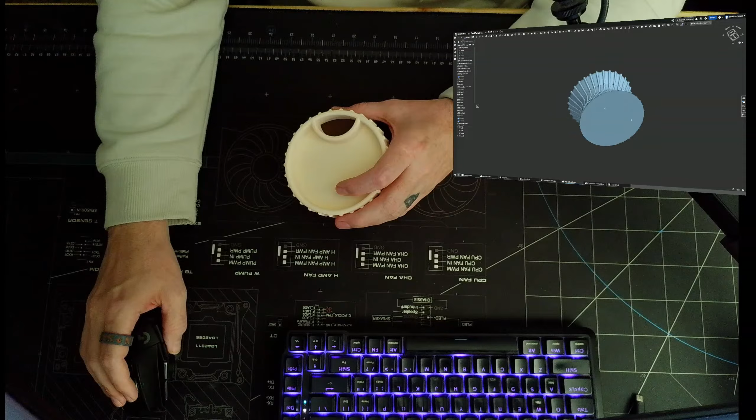So like a tire, is what I figured, with tread on the outside and then like a rim on the inside. And same thing, you just take out the middle and you've got all your stuff inside, and you dump it out when you're done.

It's more of one for just sitting on a desk. And here's like the locking bowl. This is the one that I just showed. So now when it locks, all the ribs line up. I designed this one off a little bit here - this was like my first one that didn't line up.

Oh, I know I'm live on Kick.

So I had to - well, no, this one does line up. It was one of these. This one didn't line up. I just designed it all, and this one was just a bowl.

So I have one on the back. It doesn't lock or anything, so the lid just comes out and just sits on the inside. I have one back there that I could show. And this one is just another one, smaller, with no ribs on it. And this was the original one I started with - I'd put like a base on it, like a cup.

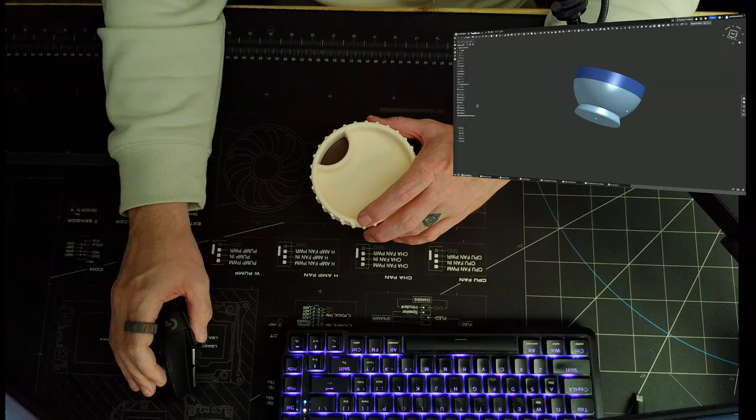Oh, I just realized I'm kind of making it hard to see anything that I'm doing on the screen.

So I kind of just iterated across the whole way. I've been designing for a while, designing little things that I needed around the house or whatever. This is only what I've done in Onshape. I'm learning Onshape now. This is the one I just did, which I have videos and pictures of that I've taken.

Let's see if I can just show everything. There's going to be a couple things in here that aren't lined up correctly. I think that's going to be wrong. That's wrong.

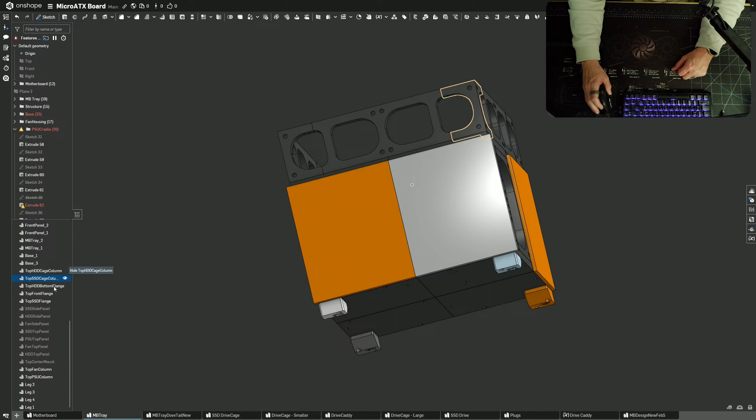But essentially, this is a NAS, a 4-drive. Let me get the panels off. Front two panels, where are they at? Right there. So it's basically a 3.5 inch drive bay, and this one can hold like 6 2.5 inch drives. I just did it for support really and kind of continued it for support. Essentially it's just a full 3D printed case that I made for a NAS.

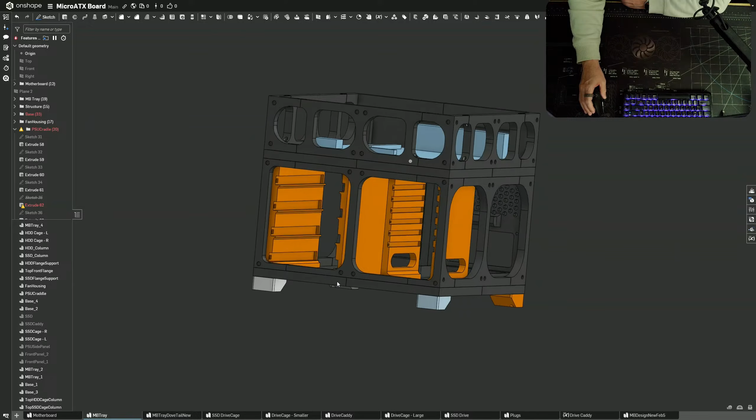So it uses a micro ATX motherboard, and a... what are they called again? I already forgot. Is it a mini PSU, micro PSU, PSX... SFX PSU. So a smaller PSU or power supply has a single fan that kind of blows over the drives. Yeah, it just kind of fits.

Took me a bunch of hours to design. There's a lot of holes for screws and some magnets for holding the sides on, and some feet. Everything's labeled so when you're printing it, you know where things go.

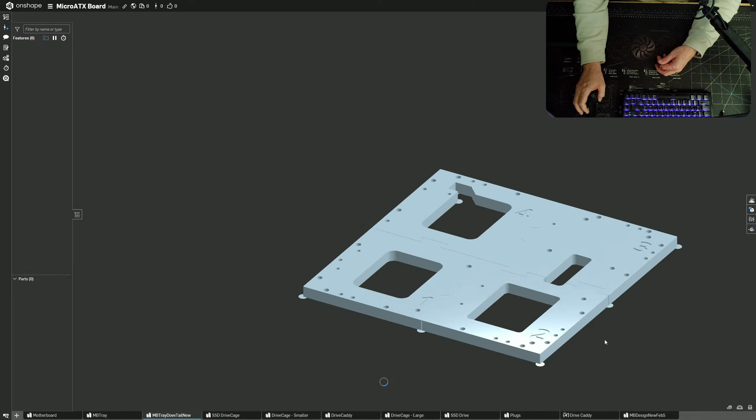This is the original design I had for the top. This is my new design, which I think is much cleaner. If it'll load... it may not load. Yeah, it's not loading any of the features or anything, so I don't know why it's not loading.

Here's the drives, and then you can turn on the SSD. I don't know why they're not sitting together. And then here's the 2 drive bays. Everything was just to make sure that it fit. I don't know why this one's not loading.

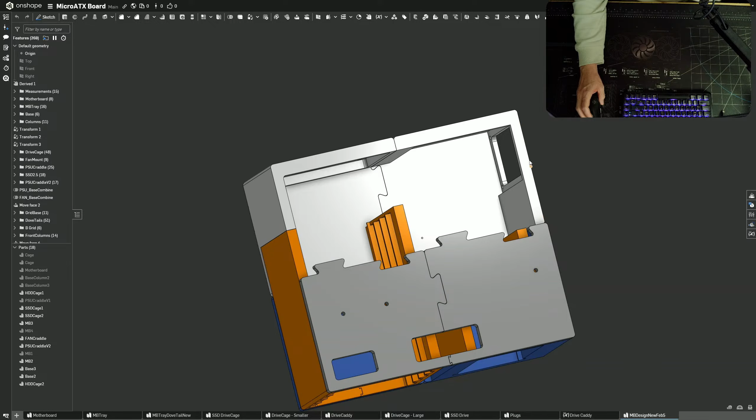That kind of sucks. I think this is one I just started on. Yeah, this one I'm actually trying to make smaller. So here I only have one 2.5-inch drive, which I'm probably going to make more of. I got the SFX power supply turned 90 degrees, so it's pointing towards the drives, so it's not as butted up against as much stuff, because this way is longer. I just kind of moved everything and shrunk it down. The other one was like 13-inch by 13-inch, so this one's more like 10 by 11, if I remember correctly.

But this is my new style. I need to go through after printing a couple of things and adjust these dovetails - they're not going to be tight enough in this current configuration, so I need to fix that. But I did print these.

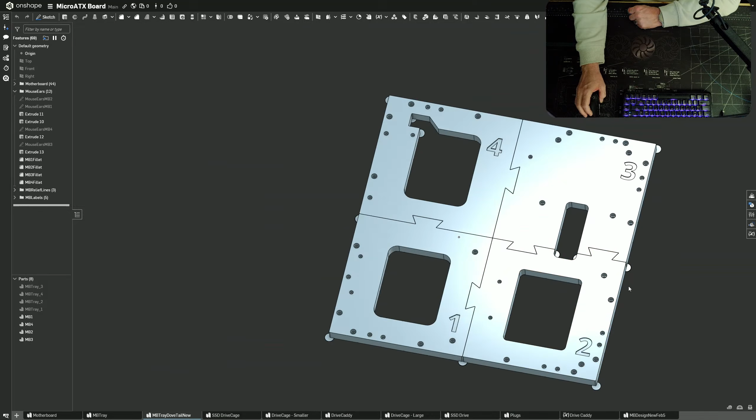Yeah, so finally loaded. This fit fine. Before I put the chamfers, or the fillets, on the edges and corners, it fit really, really snug and worked really, really well. A lot of these cutouts are just to save material, because this thing is like, if I remember correctly, 10 millimeter thick, 12 millimeter thick. So it can use a lot of filament. So yeah, that's it.

So this one took me many, many hours. I'm hoping that this is similar.

Hey, what's up, Kimmy? Yeah, yeah, yeah.

I'm showing off this. So what I'm planning to do, and you can still see my hands, I decided to buy... I don't know if you can see it, away from the camera, up over here. So it's a Stream Deck module, a 32 module, or 32 button, instead of the 12 I have, or 15 or whatever. So I decided I would design... you get this for cheaper, like it says 199 on it, but it didn't cost me that. This is cheaper than buying an actual Stream Deck XL, because it just comes...

Let me do this. It just comes with, basically, it just comes with the inside of a Stream Deck. That's it. So it's just like the screen, the buttons, and the electronics on the backside needed to properly configure it. So I figured...

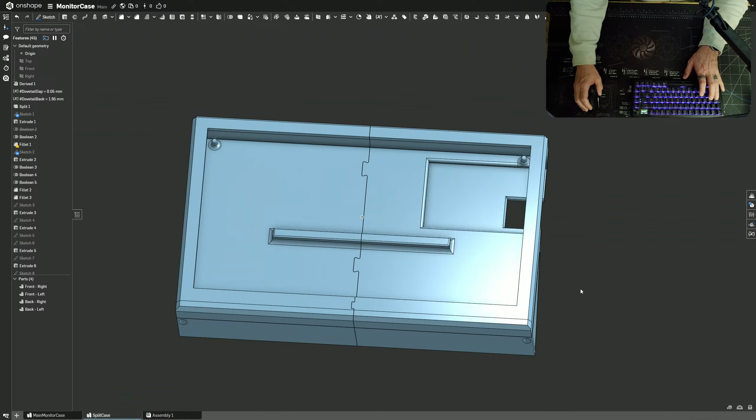I don't know how long I'm going to do this. This was more of me showing stuff off that can't really be seen. But this is the monitor case, and like I said, I want to conjoin it and find a way to have them be like a single panel, with the monitor as well as the Stream Deck XL.

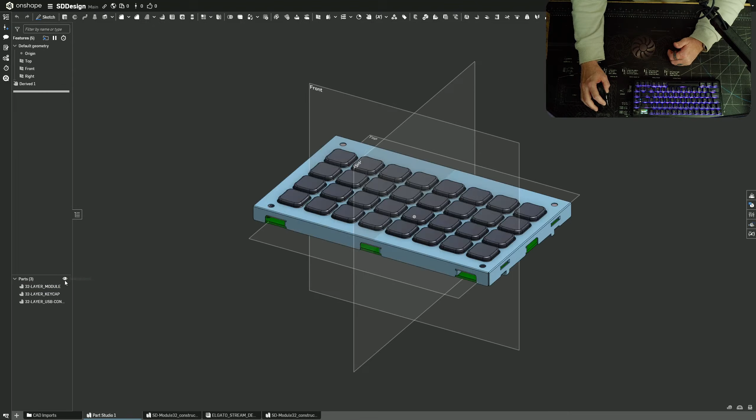That's my plan, that's what I am doing. So for this one, I am going to design a Stream Deck case, I think. I've never done this with people watching me, so it may go well, it may not. But basically, they give you the files you need to have a mockup or model of the actual device that's in the box.

So now I can build a case around it. Probably put an angle on the back, like if we look at a regular Stream Deck XL. You can't really see the back, but it's got that little bit of a curve back there, so I'll probably find a way to mimic something similar.

Maybe a similar angle to that, so I can have something similar. It won't have any Stream Deck branding on it. They don't have any actual side shots of it, they've got it laying down.

Let's see if I can find one online. I don't like DuckDuckGo, I don't know why it's using DuckDuckGo. Let's see, image... there's a side profile. So I could do something similar.

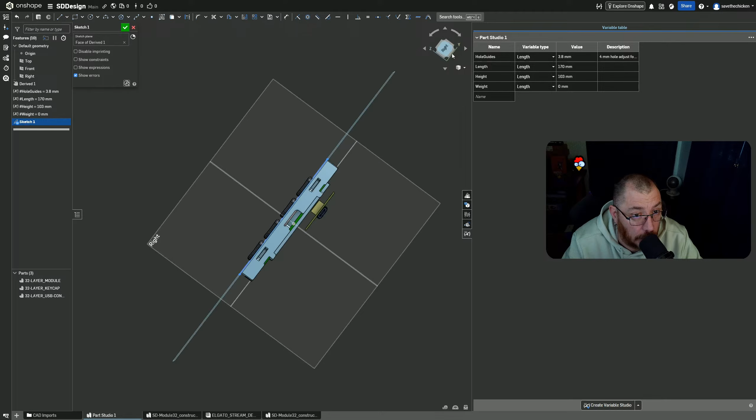All right, and then the width, I don't really know yet, but it's going to be whatever it is from this top line to at least that line. So that's not 143 millimeters, I can tell you that right now.

Let's do this. Let's do that. That to that - that is 22.18 millimeters. So we'll just do 23.

And we'll put 22.18 as the actual measurement. That way I don't forget.

And actually, let me redo this. That is 102.64.

And then I can't do that one from here, I got to do it from here. So it is that to that. So wait, I just did that. I'm a dummy - see, this is why. It's this one.

That, let's just do the whole thing to that, is 168.9. Okay, so now I at least have the original dimensions.

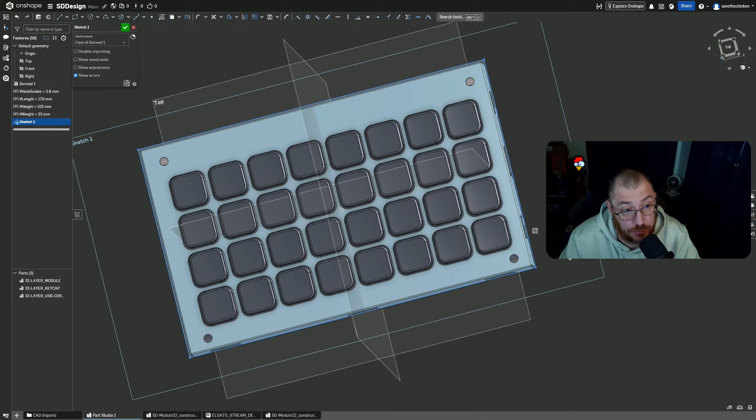What can I... the original dimensions, for some reason I couldn't think. It happens, it happens.

And then really all I got to do is account for the USB cable coming out. I think if I recall correctly, let's look at this again.

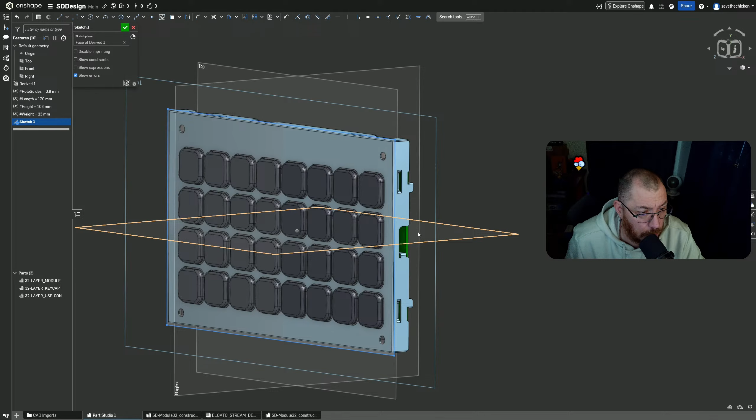Huh, I was just recording. I should have looked to see. And then if I open this up.

See, this is why earlier I turned the camera or the lights up so that you can see on the desk. I'm actually going to make a light that goes along the bottom of my monitor that'll shine straight down, so if I ever want to show anything off on my desk, I can.

But if we pull this out, so see, it's just the buttons, and then it's got like the back, and then it's got a USB-C right there. So I just need to make sure.

So that's the top, that's the bottom. Yeah, so the USB-C will go out this way, which will be the right direction on my desk that I want the cable to go. So that's perfect. And I think I should be able to just drop this back in. It kind of catches in there, but I think that's just because of how I took it out.

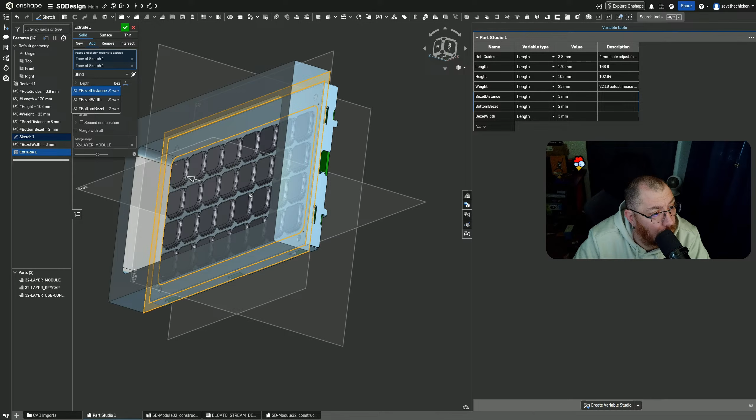See, I don't really want it to be too much higher than the buttons. So what if I do 1 mil? Did I just go? I did. Son of a. All right, let's fix that.

This is new, we are not adding it to the front. Okay, so I think that's fine. The holes are behind it, so I can use them as guide holes for mounting it to make sure it's in the right place.

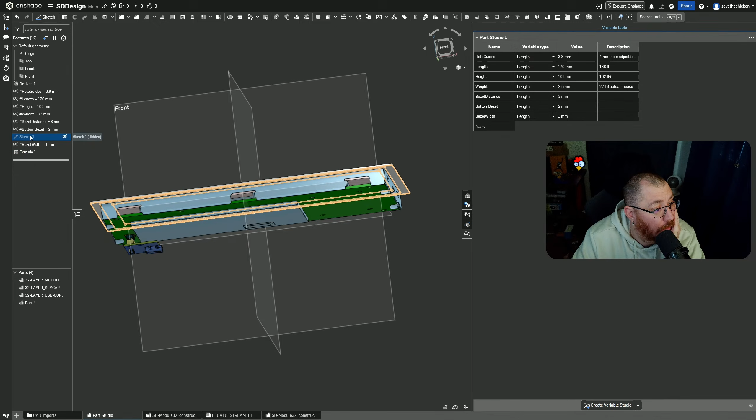And then I can turn back on my sketch. Why are those construction lines?

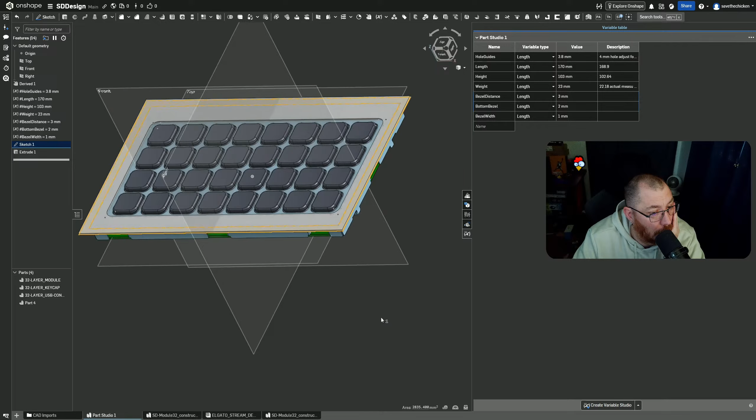Oh, must have been because we were underneath. We're gonna go back. So what? It was 23 millimeters is the actual depth. So we're gonna do the opposite direction.

25 to start. We'll just actually do what's here. So I put it as weight - that's supposed to be width. Let's change that. Let's change the name real quick first. Why did I put weight? Width.

That might be a little close. I don't really want to have the back of the case at all sitting on that. But, yep, that should work.

All right, so let's just do that. Let's see. So it added to that. So now we have the front of the case done. That was easy. We're done. Appreciate everybody.

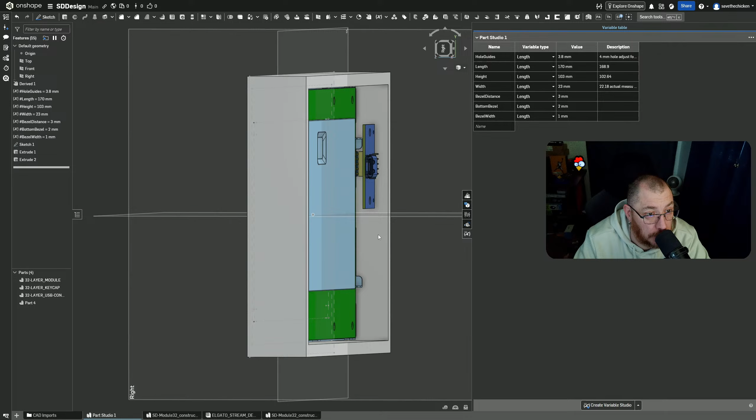All right, so now, and this would be easy because I don't have to do angle planes or anything really. I just need to draw it off because I think this is probably best. And I can round everything over, make it more modern, so it's not just square. I have to figure out what angle I want it to be at, and I probably want to extend down this front part, or have it where when it's at an angle like this, it doesn't just have this square look. So maybe have something that comes down.

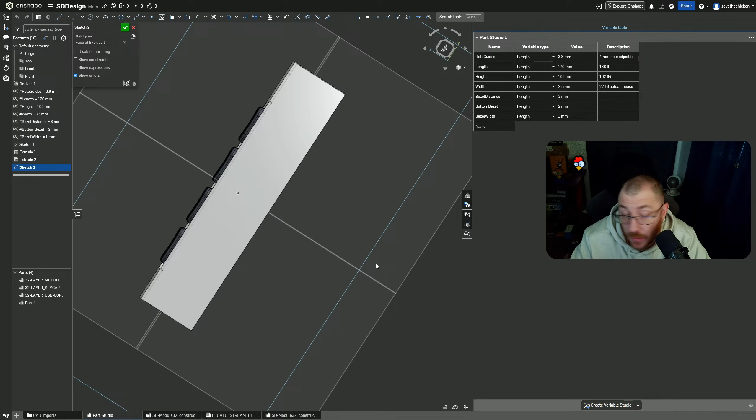And meets over here, goes that way, and then goes up, maybe. But to start with, I'm going to build off of this. We're just going to build something that looks like something. Because it's going to have to be two pieces anyway, since I'll print the front. I guess I could print where the back closes so it looks like this, and maybe give the back a slight angle, kind of like the actual Stream Deck has.

So if I have this, like the actual Stream Deck - if it doesn't have this back on it, it has a bit of a taper angle on the back. I mean, it's kind of what I was trying to avoid. It actually has a very flat front end.

It's obviously a two piece, so I could even make it where it screws in this way, because I have plenty of screws that can go into a heat insert, and I got plenty of heat inserts. So I could always have it screw together on the back, and then either dovetail clip in the actual angled piece, or I could just design it in there but have it be a separate piece, because you got to have a way to get the Stream Deck in and out.

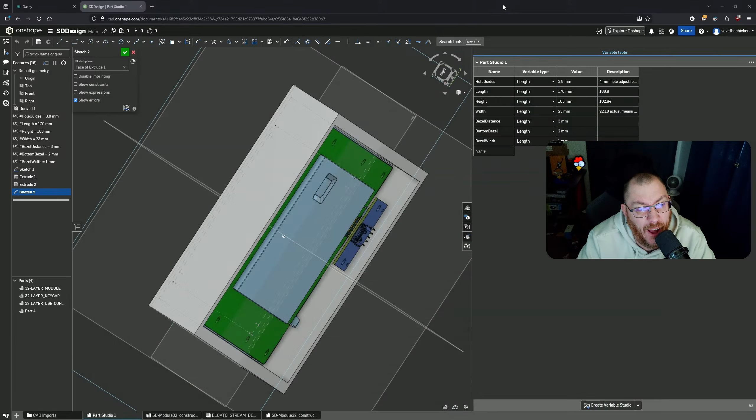I'll build it a couple different ways and then come back to it. That's really what we'll do. So I think I'm gonna put a little bit of an angle, and I can actually have the angle come off - it doesn't have to be as harsh. It just has to get around this. So if I'm building off of here...

How do I want to do it? Have it come... I think I need to - I don't know if these are going to be referenced. Let's see if I grab a line. Oh, it is. Okay. All right.

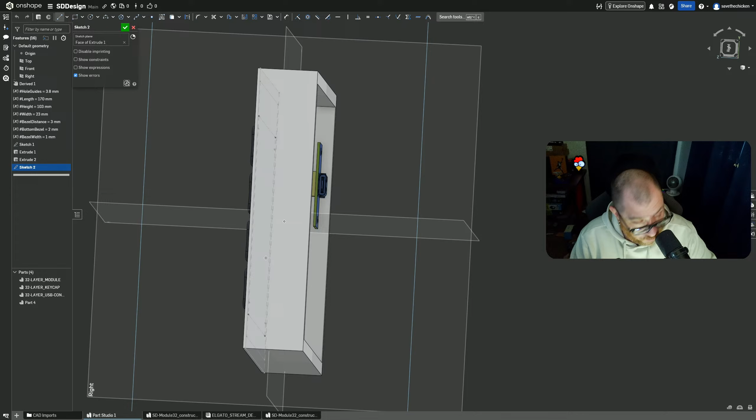So I could... oh, I wonder if - I got to look at this box, which means I can't see how thick. It's 12.5 millimeters at the base, 22.2, 103, and 169. What am I - how off am I on all these? 103. Wow, and that actually says it's exactly 103.

It gives you some really good data, and then 169. Yeah, so I am good when it comes to - I got a millimeter on each side, half a millimeter on each side, which is what I was going for. 103. So if I look at...

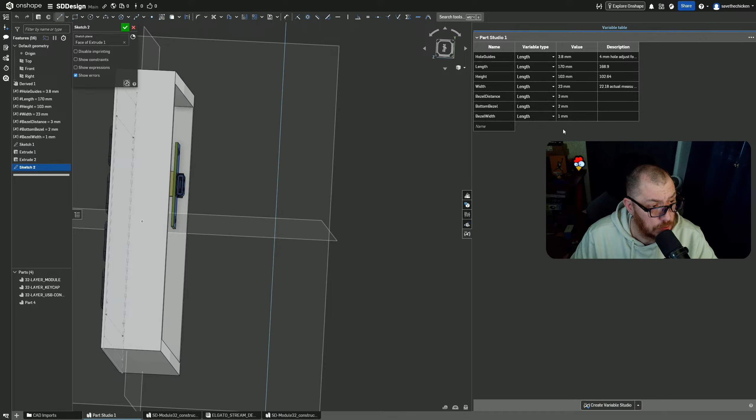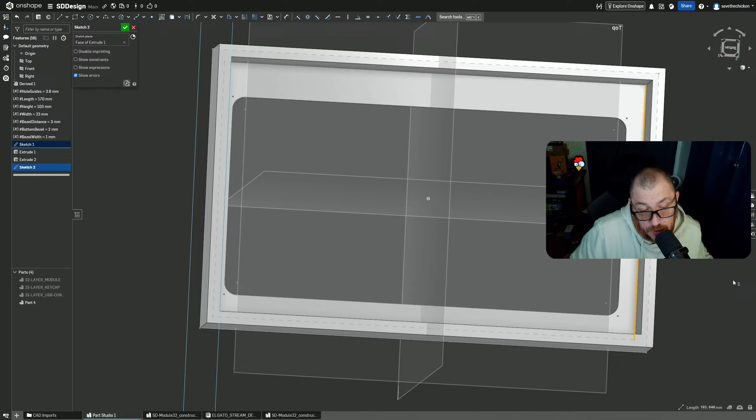Let's get this out of here, we don't need this right now. So if I look at this inner line, that is 103.64, so that's not quite half a millimeter on each side, I don't think. Because if it's exactly 103, that's only going to be like a 32nd of an inch, or a 32nd of a millimeter, which again isn't a bad thing. I can deal with that - it'll be a little snug top and bottom, and there's nothing different on it. But 12.5 millimeters is what it is, thick on the bottom.

So I essentially have to come out 12.5 at least. So let's do that first. Let's get rid of this one, I don't need these right now. I do need the part. Let's draw a line in here.

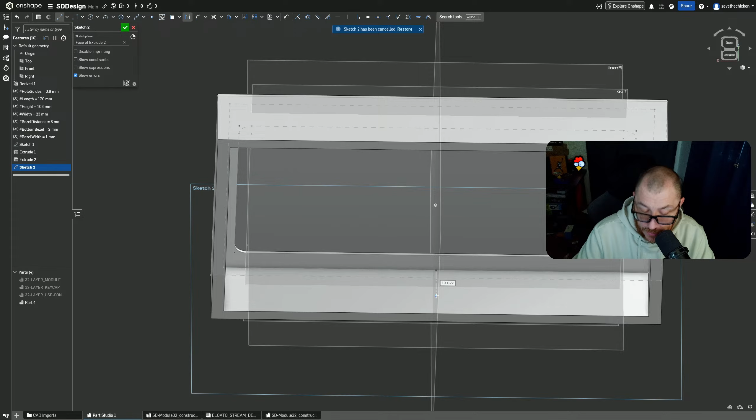First do a construction line. Let's get the middle of it. Okay, right there, should be about right there. Yeah, we're going to go out 12 point - I keep saying what it is, what is it? 12.5. So we'll go out, we'll say 13, which is almost exactly what it is right now. 13 mil. All right.

22.2. So if I come out to 25-ish at the top, that should give it enough room to do what it needs to do. I have to make sure I find a way to properly mount it in, is all I need to do.

And maybe that's just like clips where it kind of clips in. Or I find a way to screw it in, or I glue it in. I could even use hot glue—I've got a lot of that. I do crafting, even if Crafty Kimmy doesn't think so.

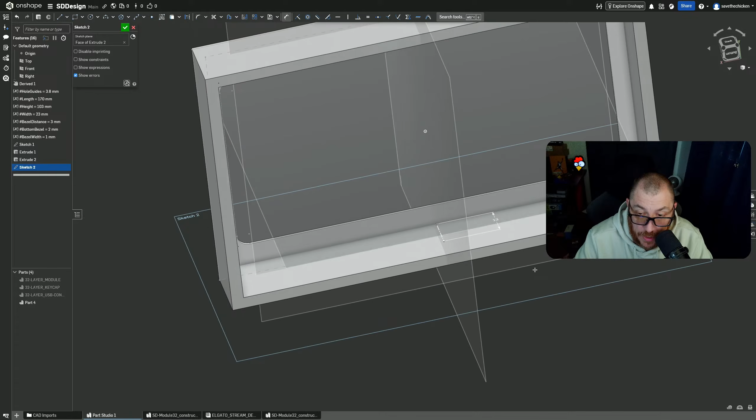All right, so we're going to go here to there, and then here to there, just to have the line. I don't know if I'm actually going to use it.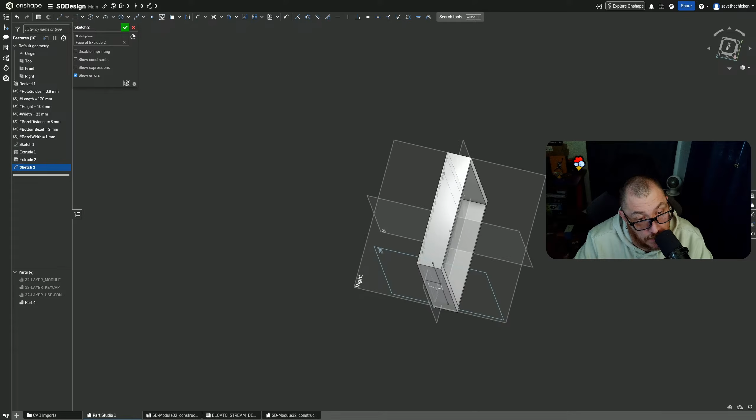I might need it because I'm basically going to say go up. I'm going to pull it out a little further, I think, because of that module. That USB scares me on the back.

Because I can't go straight through—if I went straight through to there, it would cut straight through it, and we can't do that. So there's probably a proper mathematical way to do this, I just don't know it. So I might start here and then come out, extend this out, maybe come like this down a little bit, kind of like what the design does for them.

Yeah, that's what I'll do. All right, so that's fine. Do a new sketch on this side. Yeah, I think I might have to reference it, but we'll find out. I really need to get a space mouse.

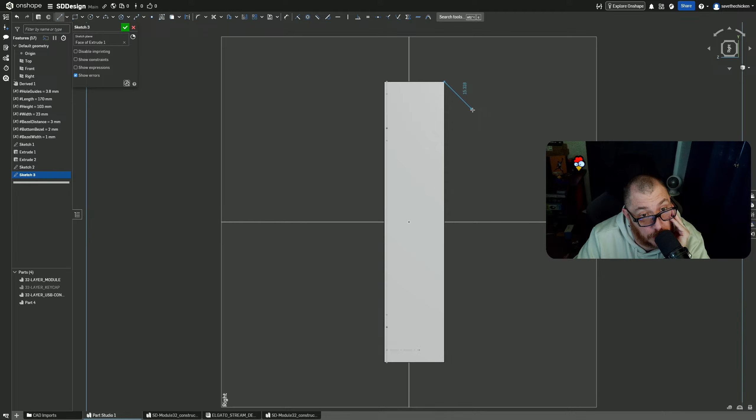We're going to come off of here, we're going to go down like 20—that should be good, that should help it clear.

What should that be? A 60-degree angle, maybe? That should be fine. Now let's see what happens when I do this. Oh, I got to reference it.

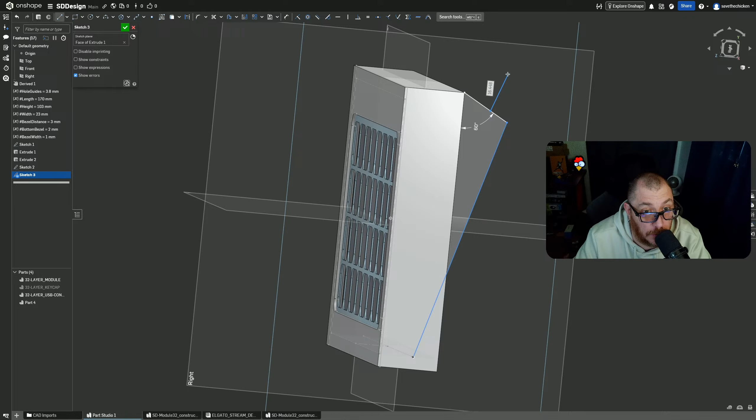From here to there. That definitely isn't going to cut it off, so that's a plus. How can it move? The angles—oh, it's going to be length, I bet. Oh, nope, drawing stuff I don't want to draw.

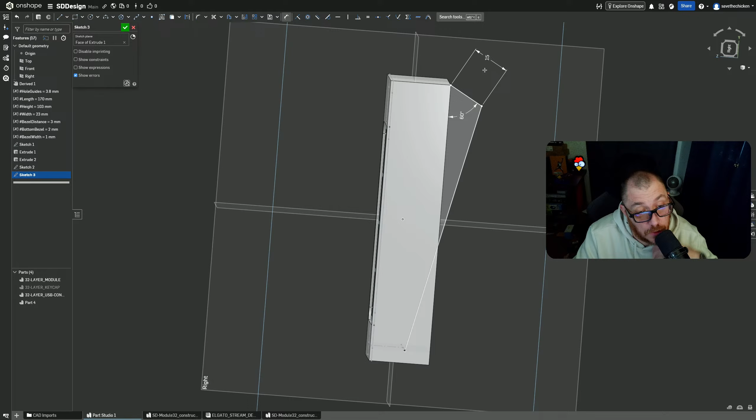Let's make this 22, so that'll make it a little bit more. Yeah, that'll definitely miss it. I could even, if I really wanted to, drop this down to 10—that's going to be really close. So let's do 15. Okay, I think that works.

So what I'm going to do—this is going to be different for me because I've never done this kind of thing before—but I'm going to do two things. I'm going to go from here. Let's see. And then from here...

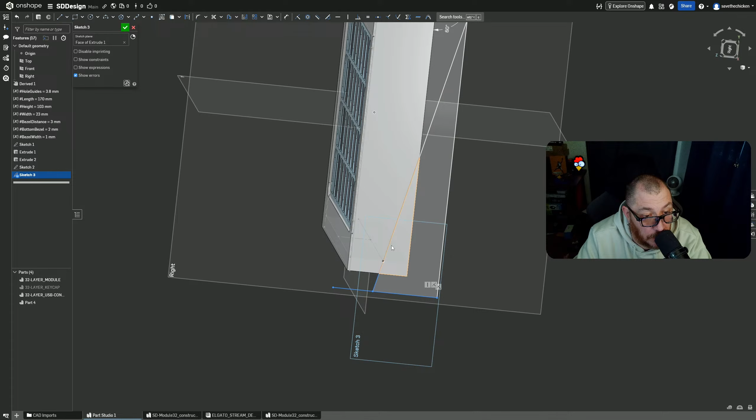I don't know how to make sure that that's straight. I wonder if I can use like, can I say this line and this line both need to be horizontal? Nope, I did not like that. I don't know how to make sure that... I guess I don't have to make sure that that's straight.

I don't want it to—oh, you know what I could do? Delete. What if I... that's not what I wanted to do. I could just go straight down. I could have it be...

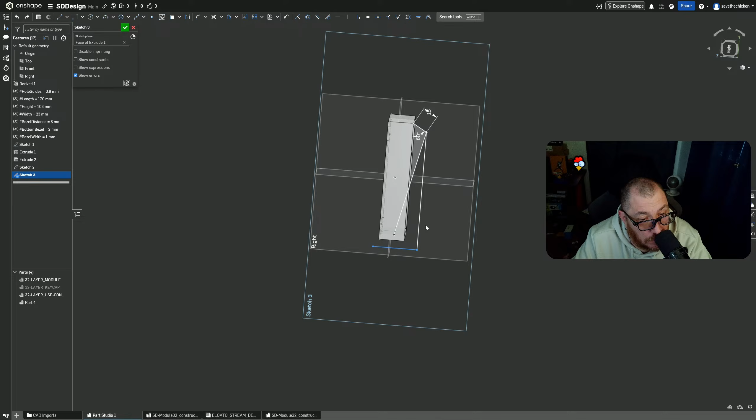I really need a space mouse, but that's the next thing I'm going to make. Let's just do this, let's just go straight down. We'll go 90-degree angle down.

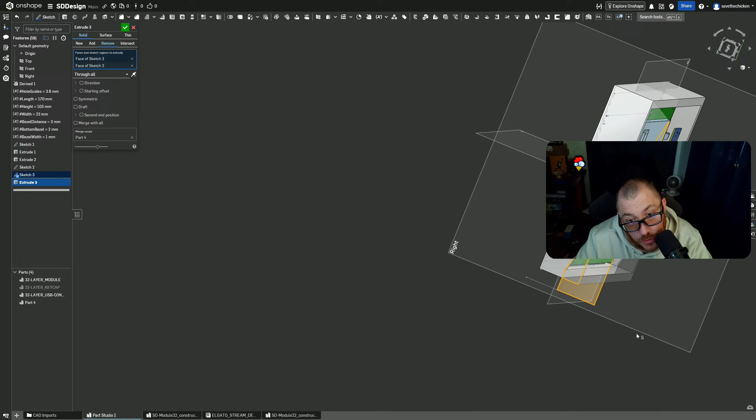So now what I can do is—let's see what happens. Doesn't go through anything important. So we'll do that, and we'll turn this back on. And then this will go through. This is probably not the right way to do it.

Add—the merge scope is going to be that. We're going to go the other direction, and then we're going to go to this face. So now we've got this back, that I can do that.

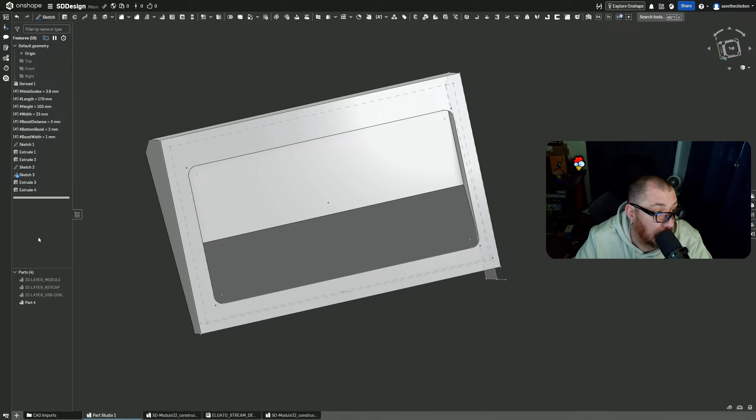And then let's get this out of there, and this out of there. And if I get rid of those because they're in the way and they're annoying—oh, I just need to go from, let's get rid of this. Select that and that. Open that back up.

Do an E, go the other direction, and through all. I don't need to go through at the top up there, though. Well, I guess to put it in, I might.

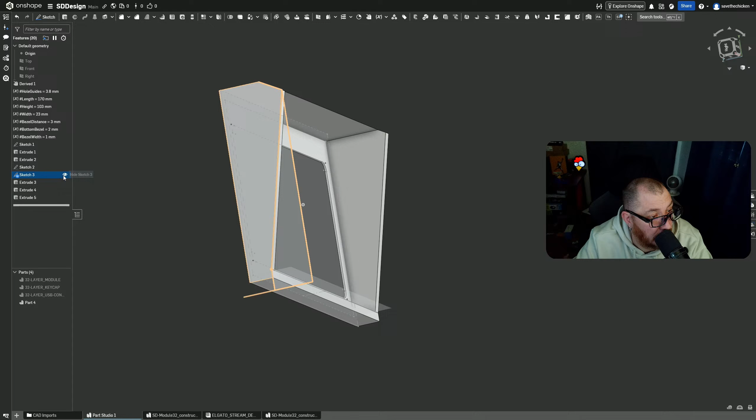So... I don't know if I like that. Let's see. Let's get rid of that sketch, that sketch, that sketch, and that sketch. Let's look at this.

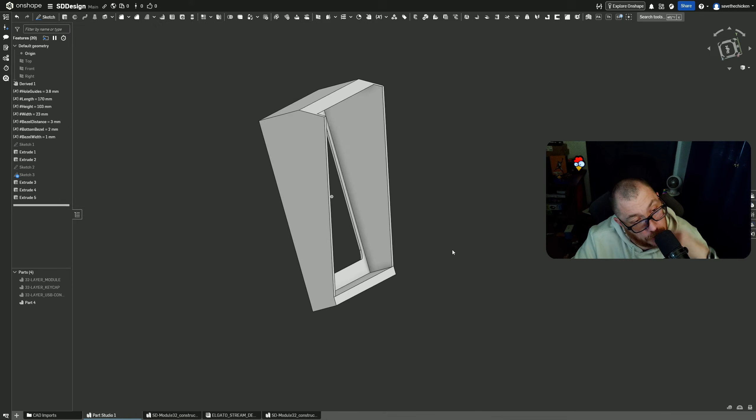I can print it like that, it'll be fine. I just don't know if I like that opening up there, or that slit. But I could always have the piece that's gonna be the—because I have to put a back on this. And maybe that's where I'm overthinking it. Maybe I put this back on and I make that the back, and then I split it at a different spot.

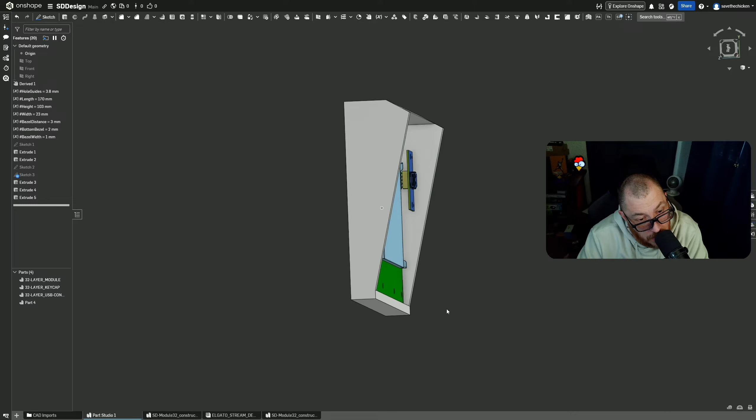Let's see what it looks like with it in there. Because I could have it split right here all the way down. See how I don't like that? I'd rather have it this way. Yep, I've got to do it. Let's go.

Let's just back up a little bit and look back at where we were at. So that's all the extrudes. No more a problem.

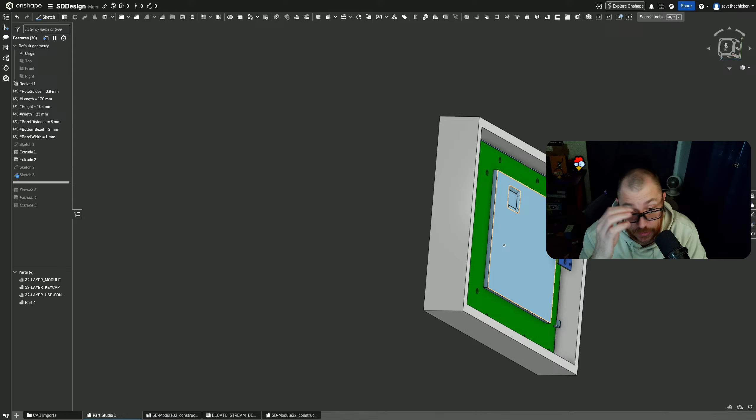I'm going to have the cord come out this side, so I'm not worried about that. I just need to make sure the cord can fit through, which I'll just make the hole here a little bit larger. I could also add another USB-C module that screws in here — I have one small one that goes from here to here, and another one that just plugs into the side like I'd want. In all honesty, that's probably the way I'd want to go with it, because I want to be able to unplug this and plug it back in so I can use my other Stream Deck.

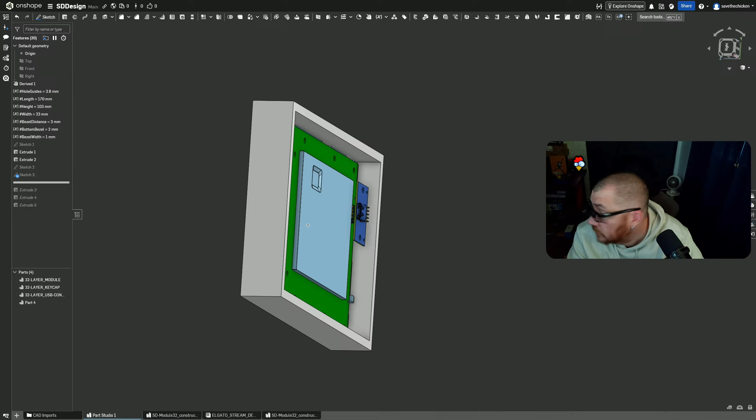Yeah, I don't know, again, I'm new to this, so it's trial and error to see what I want to do. So I have an idea.

Let's see. I just don't want it to be this fat on the bottom. And maybe what I do here — you know what, I'm dumb, let's just do this.

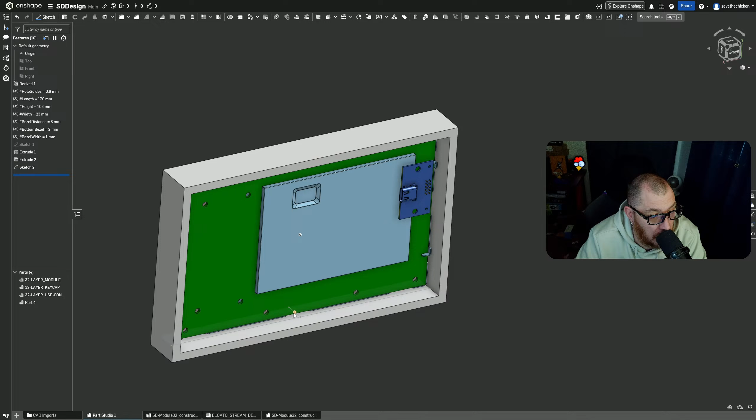I'm going to get rid of all this. Probably a better way to do this, but right, I'm going to get rid of that. Okay, and instead of — what was my 1 mil? So I just need to go, what did I go back on this one? I did 13, yeah, 13. So I just need to go 14 from here.

So let's do a sketch on the bottom. We're going to do it from the middle, which is right there.

Hey, what's up, Turtle? How you doing?

We're going to go 14.

Hello, what's everybody all surprised about, huh? You weren't here for the beginning.

So I have a Stream Deck, a regular one that's only 15 keys. Wanted one that was bigger, so instead of buying the XL, which is like $250 or whatever, I got the Stream Deck module, which you can't really see all that well because I don't have my lights on, but it's basically the insides of a Stream Deck. So I could design my own little stand and case and put it on my desk wherever I want, and if I don't like it, I can change it without having to take stuff apart.

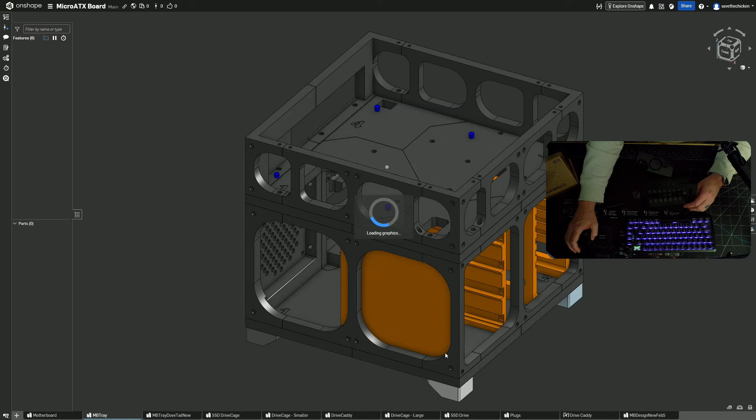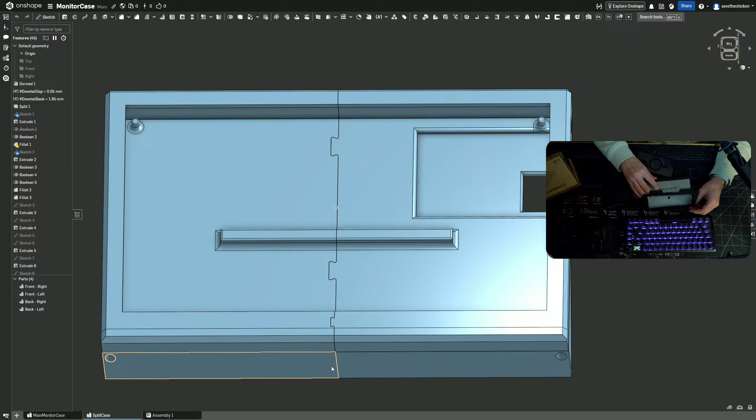So that's what I'm doing right now, is I've done a lot of designing, as I said before. Watch, I'll show you — I've been designing across multiple programs, and obviously I made all those chips, but I've been doing a lot of different things. Like I made this entire computer case for my network attached storage — I designed all this, made it work, and fully printed it. It's sitting over there working right now. I have a touchscreen monitor on my desk that I used this and made a little case for. So I decided, why not? And since I'm doing this, usually for a couple hours on a Saturday while I'm designing all this stuff, I might as well stream it and see if I can record it and put a video up on how to do it, even though I know I'm not doing it right.

What's up, Snake, how y'all doing? Y'all can hear me, right? I don't have my headphones in, I'm not listening to anything, I'm just talking.

Yeah, so that's the plan. So now I've got this Stream Deck, 32 — 32 button to replace my 15 button. Got it for a fraction of a Stream Deck XL. And I'm designing a case, or attempting to — attempting to is probably the more appropriate term, because we all know.

Oh yeah, that's what I was at. I want to go back to this, edit. We want to run a line all the way out to the edge — likely I could probably go even further just to make sure, but we'll go just to the edge on that side. And let's do it on the other side too, because I don't know which side I'm working off of.

All right, so now I've got that. So now what I'm going to do, and what I'm doing here — let me show you again.

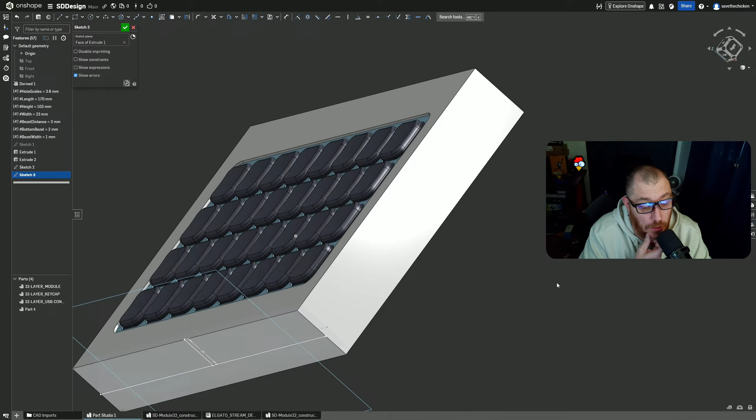I could just take some of the walnut or cherry pieces I have in the garage, cut them up, use the router, and make it into a fine piece of furniture. But I'm also going to be building a new desk in the next few weeks, hopefully out of maple, and maybe I incorporate it into that, building a command station where everything just sits inside. Yeah, that's the plan.

I don't have any music going or anything. It's probably not as fun.

My plan is now I'm going to stop that sketch and we're going to create the back. I think we did this before. If I come down here and put it on, we're going to do a 60-degree angle between here and here. I think that should be fine. That might be too much.

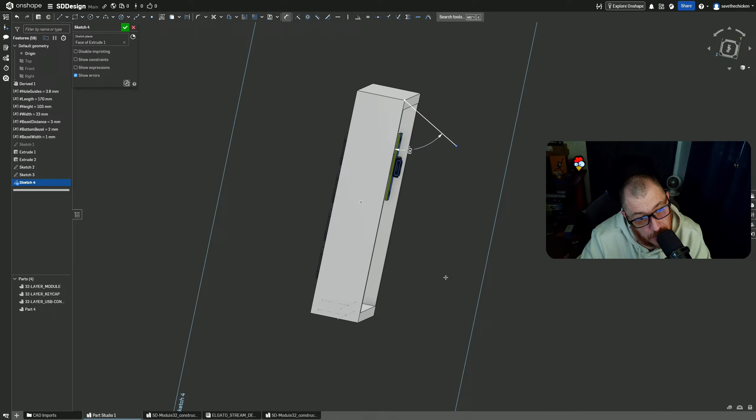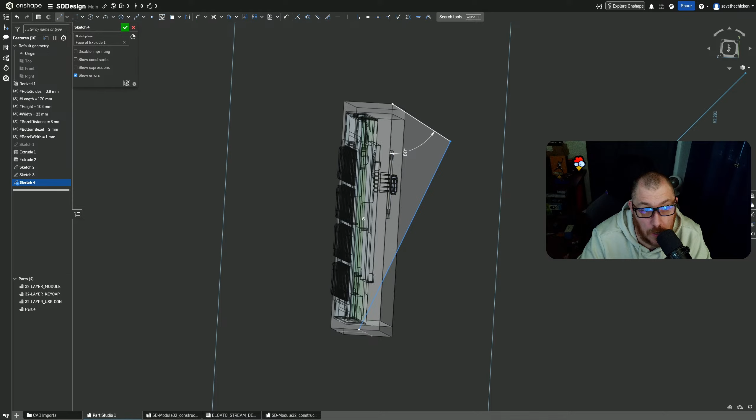And then we're going to take it from here to there. That is definitely going to be... here, let's do this. So if I look at it from the side, I just don't want to hit any of this. So if I shorten that to there. Yeah, I think that's fine.

Let's make that, we'll just do that at 10. Let's call this what? I don't even know what to call this. What would this be? Depth, back mount, I don't know. Fuck it, it'll just be 10. I'm not going to have to adjust it, so we don't need a dimension for it or a variable. So now I should be able to get that.

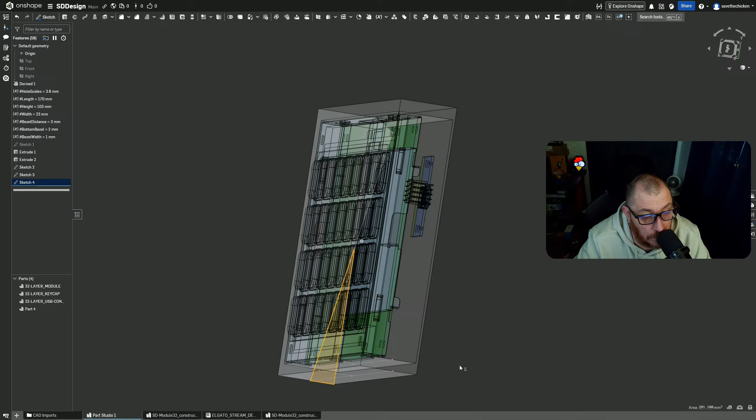You know what I want to do first? That's good. So I wonder if I can do this easily.

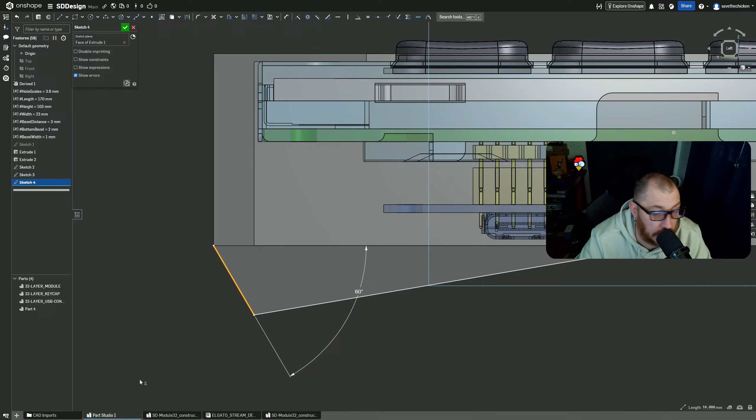That stays, is that staying above the line? What if I do this, and they need to be—let's go in here, edit, delete that. And then if I do this to this and they need to be vertical, that should set this line length. Oh, it was 10. Look at that, it was 10 mil. That was almost perfect. That means, hopefully, if I did that right, that means that it will...

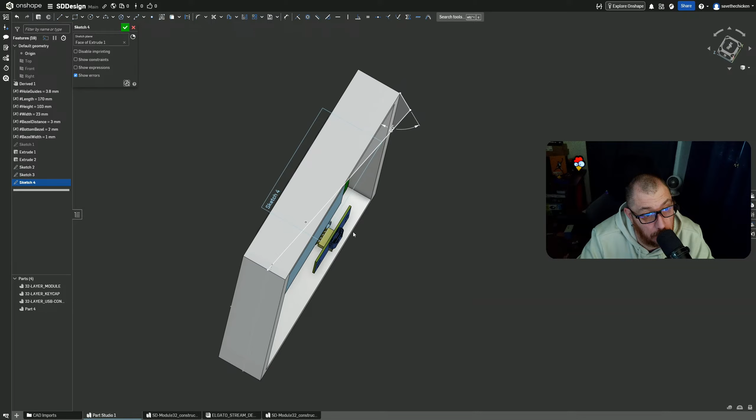I really need to figure out what all the shortcuts are for the keyboard, so I'm not having to go up and select stuff. That means that if I extrude this all the way across and then cut it out, it should match up. But I'm not going to do that yet.

I don't think I'm going to do that yet, because what I plan to—well, because I'm going to cut it. Yeah, let's do it. Let's just see what it looks like. We'll try it, what's it hurt? I can just back it up.

Back it up, so let's do this. Let's extrude this, we're going to remove that. We're going to say all the way through, so that'll get rid of that. That'll get rid of that.

Okay, turn this back on and then we'll say extrude that. Add, merge scope—it's going to merge to that, but it needs to go the other way. And we're going to say up to a face. Want it to go to that face.

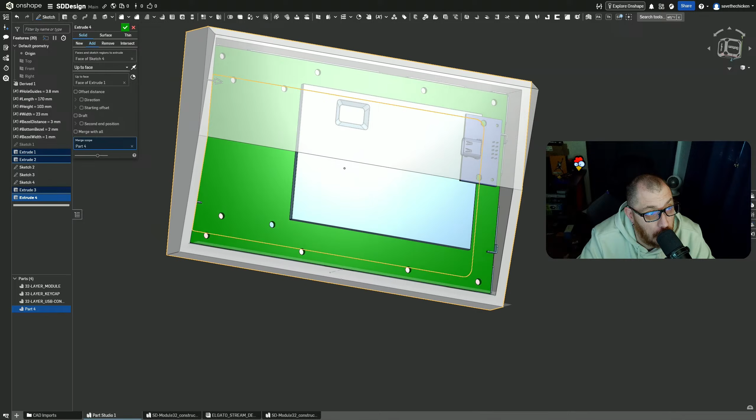See how thin that is, that's not good. I might have to make this face a little bigger. Maybe I do that. So I don't know if I did it right, because I don't really want this cut out here. I want it to—maybe I need to do this.

So let's try this. So instead of cutting this out, because I can easily recreate that. What if I do this? What if I add that?

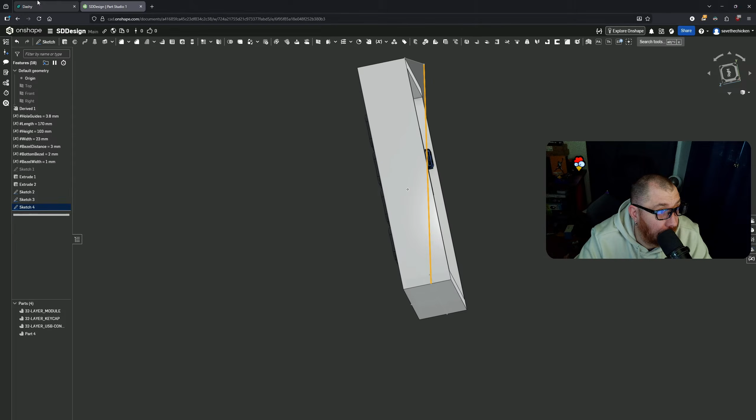All right, let's go back in here. Edit, add to this, add an offset. We're going to have it go...

You know what I need to do is, instead of going off this top point for this angle, I should go off this point, and then the top one can come out on top. And I can send that across, and then I'll have a back. Yeah, see, look, I'm learning.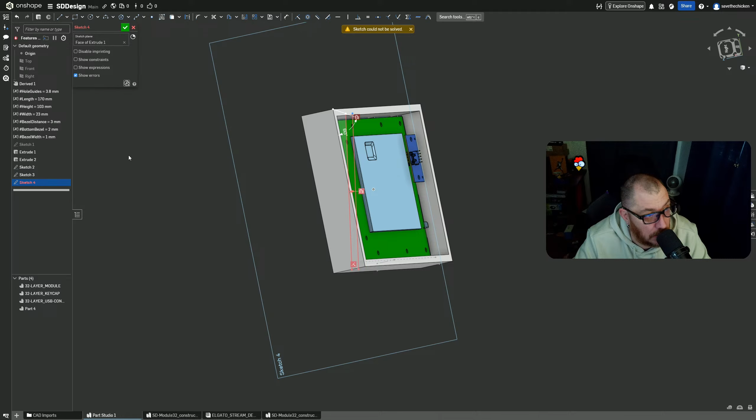We're going to get rid of this. We're going to edit this. Okay, first let's back this up, we'll create a new sketch on this.

No, this one. And we're going to go from... it's a lot of trial and error for me. I'm not professionally trained, bear with me, y'all. All right, from here to there.

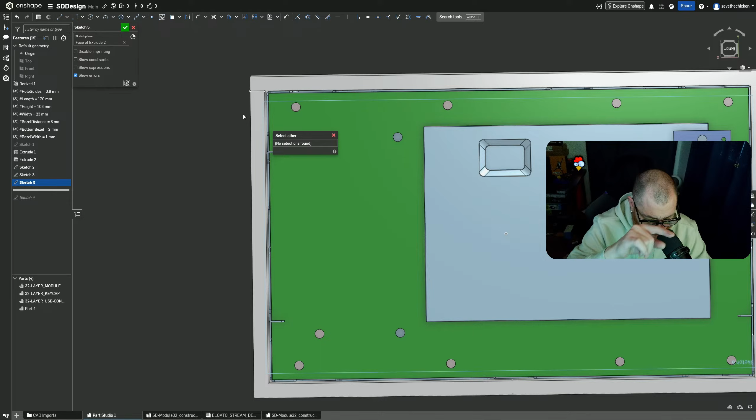So we're going to make like a triangle. I might even be overthinking this. Maybe, I don't know, we'll see. I might be overthinking the shit out of this.

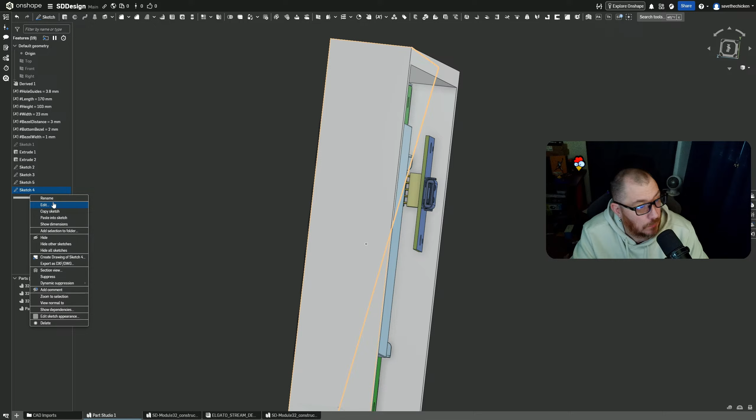Okay, so now we'll go back down here, and this point now, instead of being here—delete that, we'll bring it down to here. Okay, whatever, I just broke everything.

This will be the inside one. Okay. I think I'm going in the right direction now. So, one second, hold on.

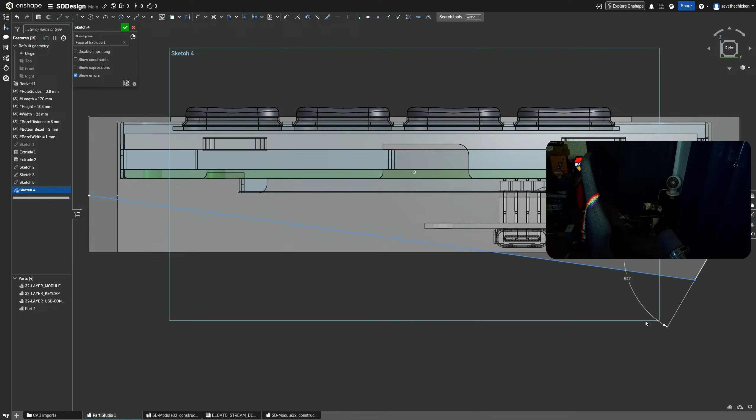I probably could have made this easier on myself, at least from what I remember. Okay, so there's that. I don't get why this is blue. Something's not constrained. I'll figure that out in a minute.

But if I do edit, which way can it move? Oh, this is not. That's currently at 6. So if I say D and make this 6.5, yeah, that gives me enough room, right? That's enough room.

Oh, what's up, Marvel? Why are you guys always doing that?

Did I? Okay, no, all right. So I've got that there. And what I'm thinking I'll do now is I'll come over top. There's probably a shortcut for that, with another one that's exactly 5 millimeters and it goes here. So I might be able to use offset on that one.

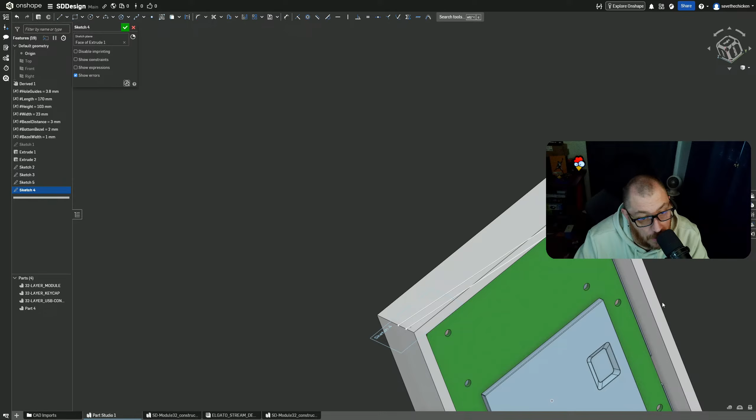Now everything is fully constrained. And now what I can do, again, I probably could have done this way easier if I had just made a trapezoid to start with, extruded it out, and then shelled it. But I think that this will work.

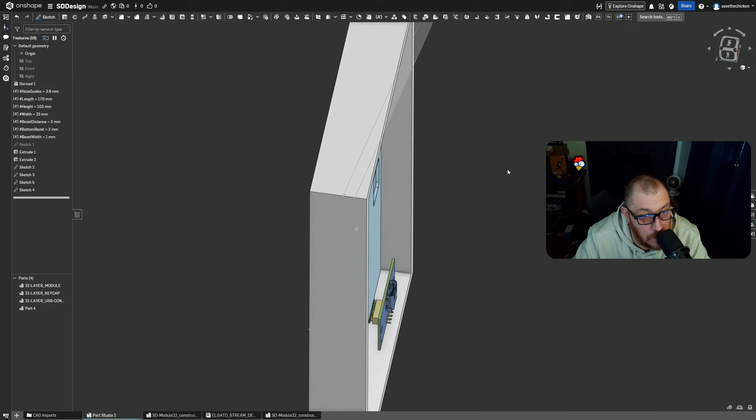So what I can do now is I can cut this out. And we'll say through all, so it should go all the way through. It does. Kill that.

And then I should be able to now extrude that, and that, as well as that. Extrude it, other direction. And we want to go through, up to face.

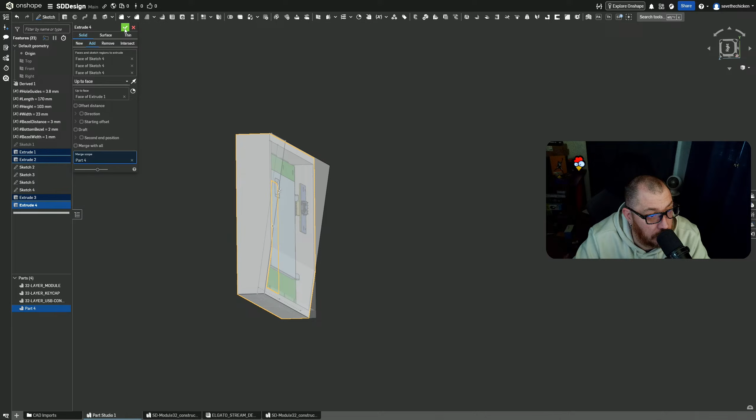So now I should have, if I do this, I now have it enclosed. So now I'm just going to have to cut it and then create screw holes so that I can just screw it together. And this would be the base.

Let's get rid of all these sketches. I guarantee I did that way more difficult than it needed to be. But I think we're getting to the same place. So if I hide this...

And let's turn these back on. Let's check it and make sure. Well, we can do. Oh, you know what? I actually haven't used a section view at all on this. Let's see.

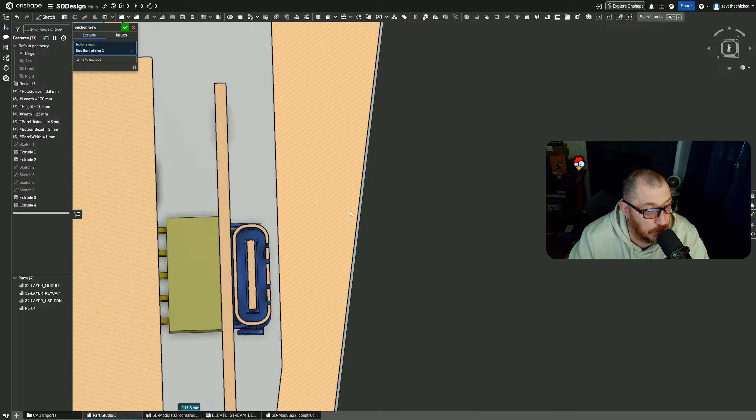Yeah, look at that. I got room. Barely, but there's room. So...

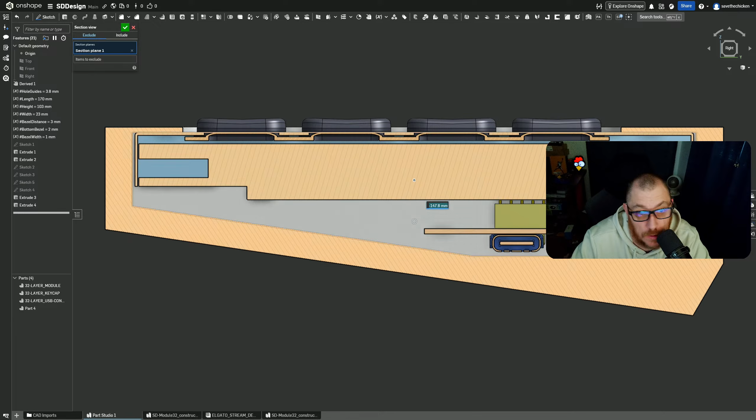As long as mine is the exact same dimensions as this, I now have a working case that I can split, like, say, right here. Actually, I need to, if I look at it from here, I could split it. Like, I could probably just go halfway through this one, which would be about right there, split it, and then I just screw in everything else.

All right, we can get off. Oh, wait, I've never done that before. It stayed? Oh, that's cool.

Huh, all right, let's turn off section view. All right, so now let's hide this stuff because I don't want that to split, because those are my models. And then what I'll do is right here, let's make a plane. Oh, shit, look at that. I don't even need to.

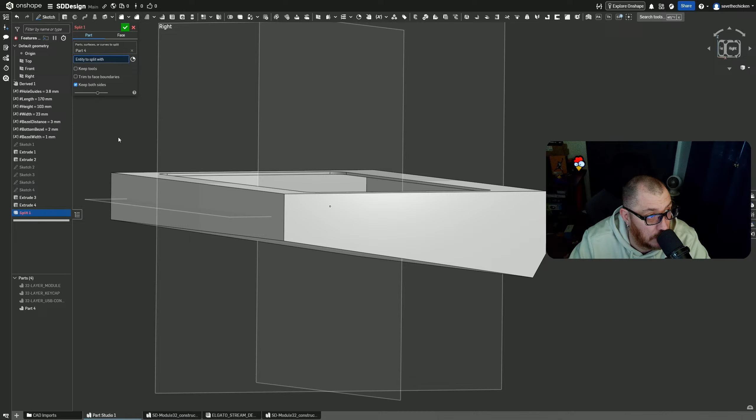We're going to split it right now. We're going to do it. Let's split it. Split. We're splitting this part. We're going to use this. Look at that. Now we got two parts. We got one, which is the back, and two, which is the top. It's just that easy.

I might have to make my bezels a little bit wider. Yeah, because I don't know if... where did I put them?

Apologize, everybody. All right.

So here are my heat insert threads. And they are, if I recall correctly, like 4.8 millimeter. The guide hole is 4.8 millimeters in diameter. So I made everything, I think.

I also need to make the guide holes for the actual Stream Deck, but I'm not worried about that right now because that'll be pretty straightforward and pretty easy. So...

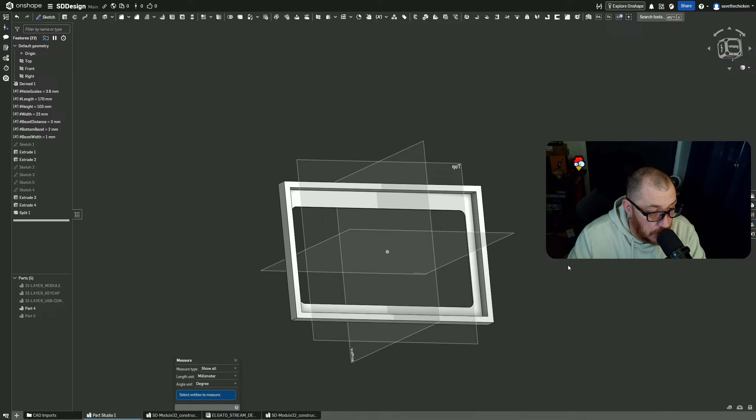I think this is all 5 mil, right? We're gonna reference my case because that's where, yeah, those are all 5 mil. So I might have to. Where did I determine that? Is it here? Yeah, oh, it's not really.

I'm gone again. What do you mean? Yeah, I don't know what the fuck's wrong with Kick.